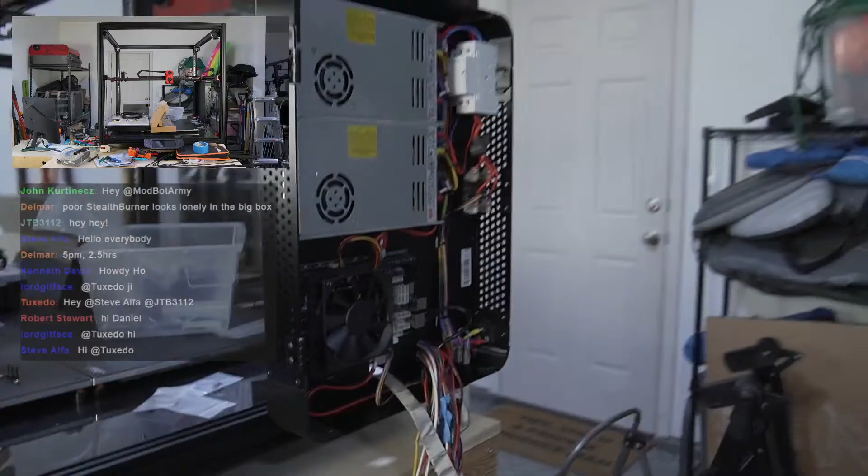So last week we had started on the cable chains. It's gonna be a little hard to see, but I will do my best to show you guys things through the crevices.

There's a notification, I can't see it. I'll run over to the tablet really quick.

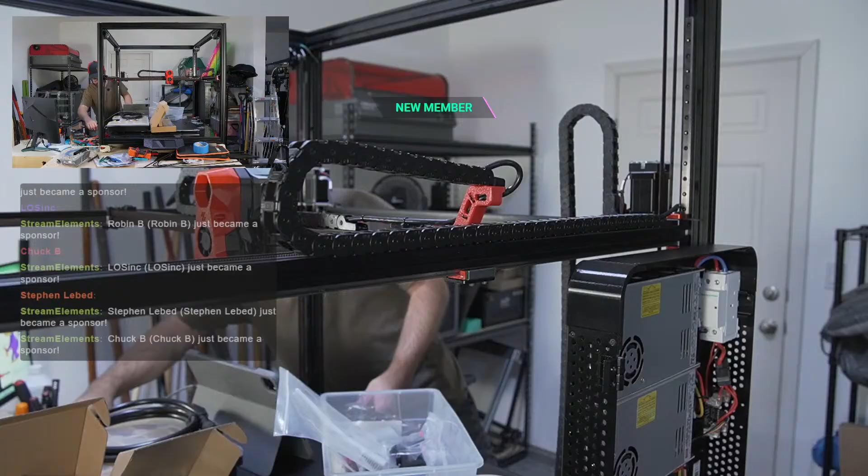Thank you, Nice. So yeah, we started on the cable chains last week. I think we finished the X, and then I was working on Y, maybe. Does that sound about right? So the things I've done: I had to move the X chain over a little bit. I probably could add a couple more links. There's a bit of a gap here. One concern I have is this cable.

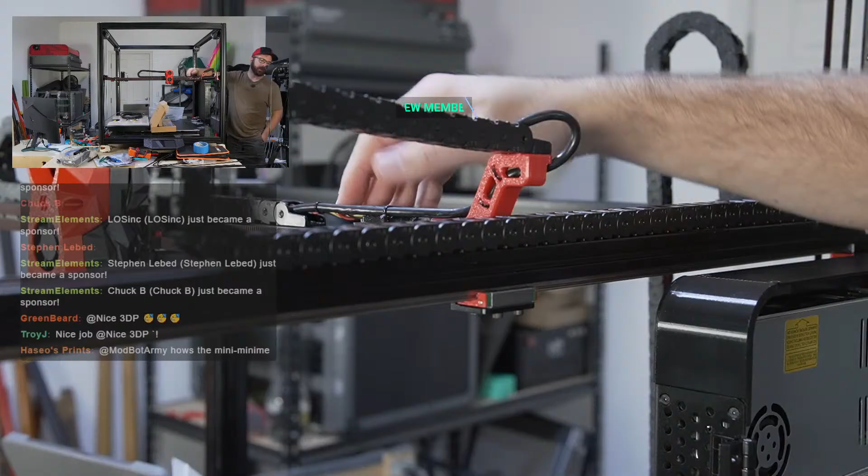Can you see that cable at all? Let me see. Not really. There's this colored cable right here, which is for the LEDs underneath the X carriage. I have some concerns about its length. I could always extend it, but it's a little shorter than I would like. I don't want to say it's got slack, it's under very light tension. So that's something we'll see about.

I probably could add a couple more chains, but I'm gonna leave it for now. I got the Y chain done, which was relatively simple, so we've got really just our CAN cable running through here. I did that, and then I've got the Z cable installed, which I just finished up last night. Let me see if I can show you guys this.

Other things I've done: I labeled and grouped the bed cables together. They're not sleeved, I might sleeve them, I don't know how much. Honestly, it's at the back of the printer, I don't think you'll really be able to see it. I don't know how much I truthfully care to cover these, but I did group them together.

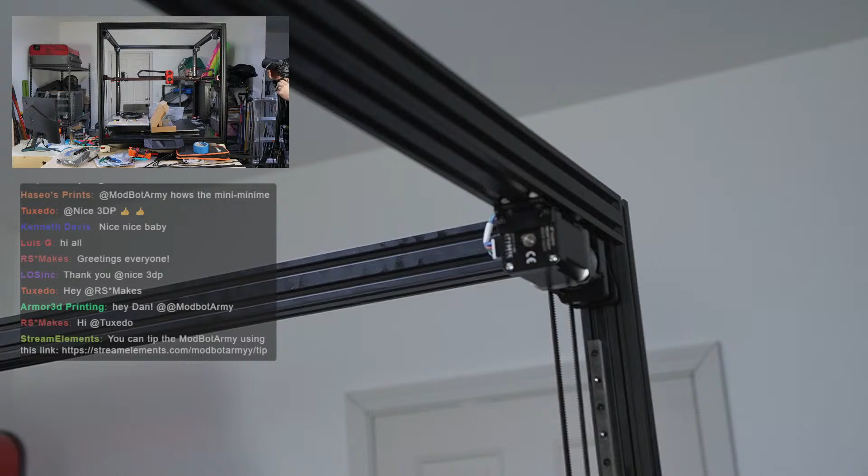I also installed, let me take you guys a little bit higher up. So the Z motors, excuse me, didn't have their wires plugged in. So I connected all 4 wires and routed them. That took me a little while, both because it just took a while, but also because of looking at this. I'll show you guys.

Let's see here. Also, let me just check chat again. Hey, Luis.

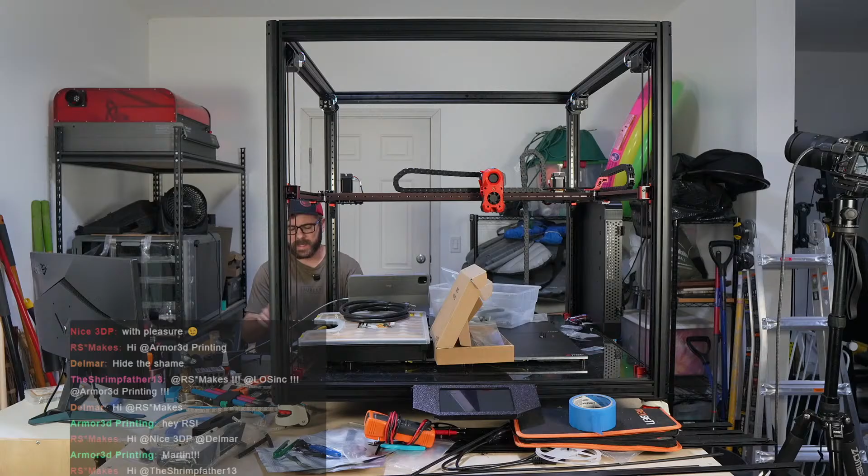Landon's been with Erin at night, and then Jackson usually wakes up anywhere between 11 and 1:30, and then he's with me for the night. So when I was trying to go to bed, I heard him crying. And as I was laying in bed for 2 hours trying to sleep, I heard him crying a little bit more throughout the night.

And this morning, Erin said he was basically crying all night long. And right now, he was sleeping for a few minutes by the fire inside, and woke up and instantly started aggressively screaming. So I don't know what's going on with him. I don't know if he's sick.

We've tried burping him, we've tried feeding him. I tried these bicycle kick things and pushing in to try to help him with gas. Tried that, had no cigar. So I'm not sure what's going on with him, but he is definitely not having a good day.

Erin's exhausted. She didn't sleep at all last night. So I took Jackson out for about an hour and a half this morning, hoping she'd be able to get some rest. But he was still up and crying pretty much the whole time. If you had asked me a day before today, I would have said things are going well, but the last 24 hours have been pretty freaking brutal.

Nightmares, trying for attention - with Jackson or Landon, Jackson is probably more of an attention thing, I think. Once I get him in the guest room, he starts off the night in his bed, and then he wakes up and now he's in the guest room, which is where I've been crashing out. And so he'll sleep through the night in there. But with Landon, I think it's something else.

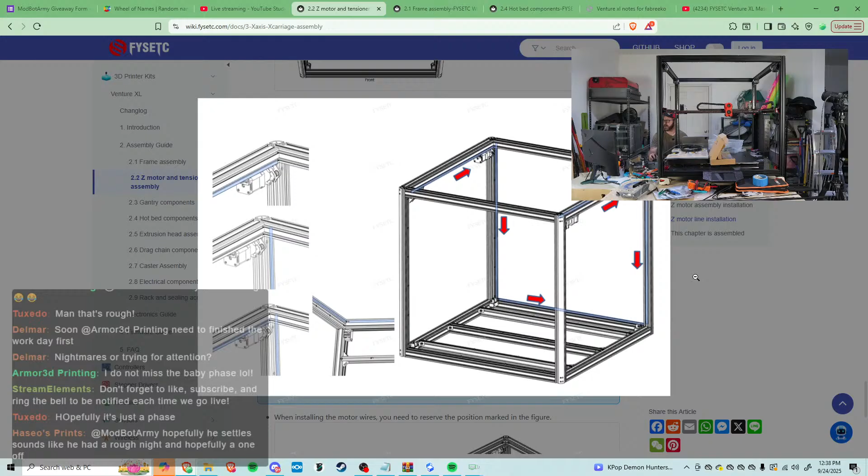So I looked at this a little bit longer than I probably needed to, trying to make sure I was doing it correctly. There's also a notice because on the back panel, where I ran the wires, you have these standoffs, so the wires have to go over those little standoff things or mounting points. But as of right now, I'm not installing panels because I've seen that they're either cut really tight or too thin, so they warp like crazy, even if you're not printing at warmer temps. So for now, I'm not doing panels.

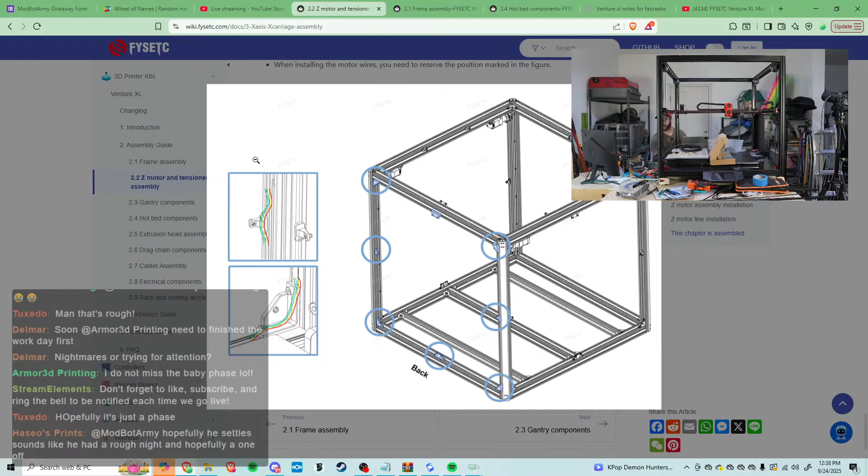That's also something you might have seen on this side. So I mounted the electronics box last night, and you wouldn't want to do this.

The instructions actually have you do this before putting the panel on, but I got feedback from someone, and it's also just not possible, as far as I can tell, to get the panel on after this is here. So when I do end up doing panels, whether it's their panels with some sort of additional secure points or whether I cut thicker panels, I'll have to pull this whole thing off, which I'm not super excited about, but it's not that bad.

It was pretty difficult getting the T-nuts, the little roll-in nuts, lined up with the mounting points on this, I will say, but it's pretty secure. I mean, this is the weakest spot because it's in the air, but the rest of the panel is pretty dang secure. So yeah, I spent quite a bit of time really just routing electrical.

All the stuff underneath the bed, I connected all of the neutral wires for the 4 beds, and then all the rest of the wires are just kind of rat's-nested through here.

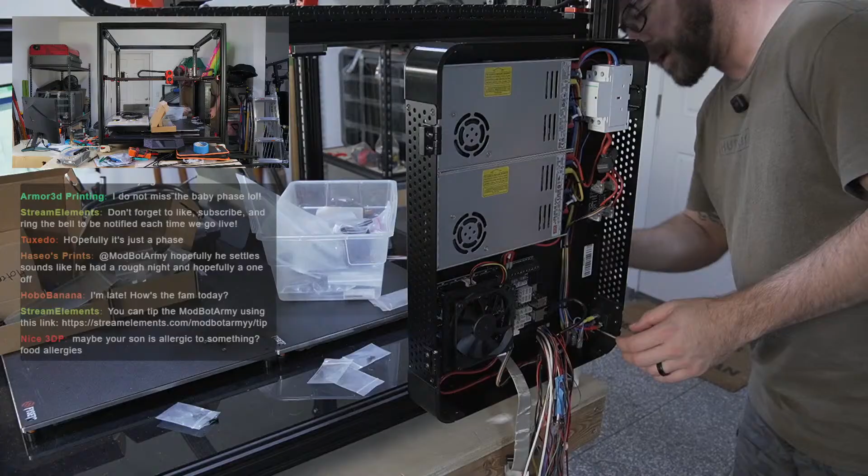I already know for certain that there's one wire - I don't know if you guys can see this or not, let me zoom in a little bit more. That might do. So for sure, this AB wire is too short. The plug, this is the full distance I can get it. So we'll have to remove that, and I'll end up probably just soldering and extending those wires so we can get them to - I think it's over here maybe, or it's somewhere underneath this fan.

Other thing I did as well, I did a lot more. I also mounted this guy, so the LCD screen is in place. That was relatively straightforward. And then my plan long term with this thing, I don't think I'll have it on the ground because it's just so big that...

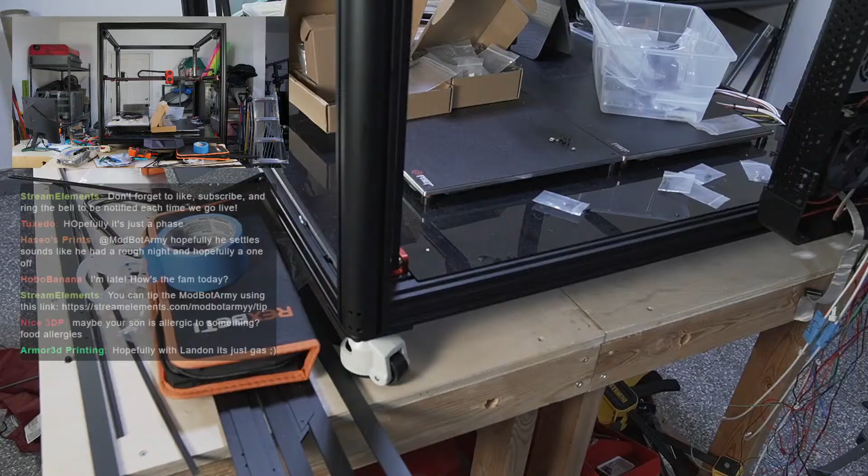No, I don't think I'll have it on the ground because it'll be at a height where it's kind of awkward to be on the ground, because it might be tall, but the build plate's still down here, so you'd have to crouch down every time.

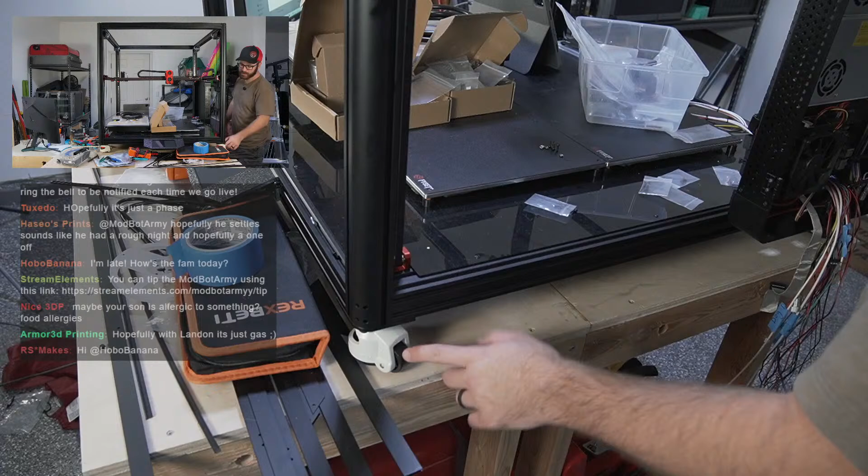So I'm very likely going to build a cart similar to what it's on right now. And the game plan was similar to what Taylor or Kanik did, was to not use casters. However, once I got the neutral wires installed underneath and the screen, I realized that at least the screen protrudes beneath the aluminum brackets for the feet, so it would be putting all the printer's pressure on the screen and possibly the neutral wire. So I did install the casters for right now.

I know that it looked like Taylor basically had printed out just printed feet standoffs, which I might end up doing, or I might just end up leaving it on casters and then basically roll it onto the cart that I make for it, and then have some kind of trim so the casters can't fall off, or the thing can't fall off. But if I ever need to move this thing or transfer it on the ground, then I've got the casters on it, because getting them on and off, like flipping this thing over, is not a ton of fun.

So yeah, hopefully it's just gas. Maybe it's allergic or something. I mean, maybe.

Yeah, it was definitely rough. We're hanging in there, Hobo. It was a rough night, man. Landon was pretty much up all night long, so Aaron's exhausted, and he's been just kind of screaming. So he's just drinking milk, so I don't know if Aaron had something, but I don't know how that all works as far as what mama eats and what happens with baby feeding. I'm not certified to speak on the matter.

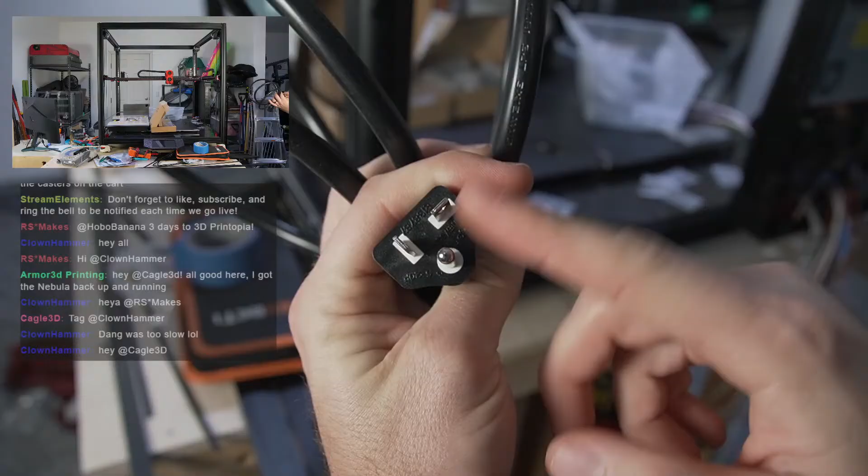There's a plug on the side of the house, but a 20 amp cable or circuit in the US normally the connector would have another one right here, parallel to each other, but on 20 amp, you've got one that's flipped 90 degrees. I was planning on plugging this into the 15 amp dedicated circuit I have in the garage, but I can't. So I have no way of currently plugging this thing in, which is really a bummer. I'm not exactly sure what my game plan is.

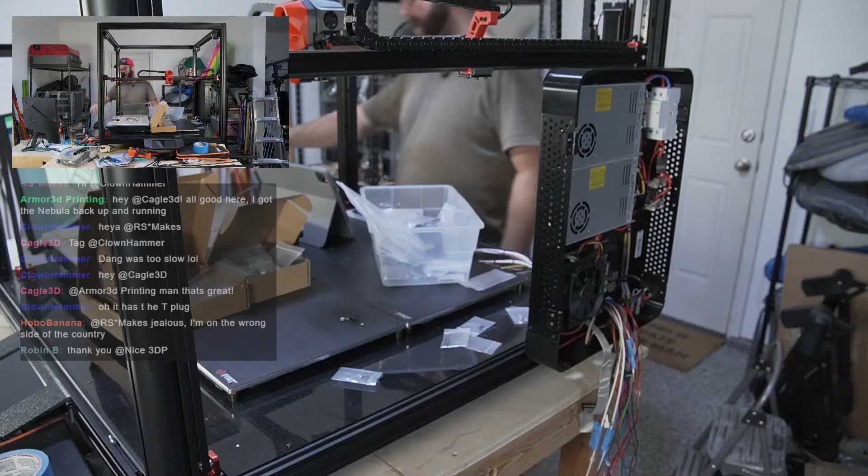The long term plan, my dryer is 220, isn't it? Is it 220? Are we certain it's 220?

So a couple things. The plan has always been that I need two 20 amp circuits in this garage. I was going to have one over here and one over here, mainly because here comes Jack.

Hold on, you want to say hi to everybody? What's wrong with your pants? Jackson's going to say hi really quick, everybody. Can you stand up? No, stand up. Stand up real quick, wave forward. Wave. No, it's way over there. Wave over there, he's waving. Hi, what are you doing with your tongue? Okay, Daddy's got to work, you got to go inside with Mommy okay? Okay I love you, mwah. I'll see you in a little bit okay? Go take a little nap, you have a full belly, I made you some yummy food. And he came out right now, I was like, what is he wearing? It's like a skirt. You guys couldn't see it right now, but he came out in what I thought was a skirt. But I guess Aaron told him put pants on before he comes out and says hi, and he grabbed a shirt and put a shirt on his pants. So that's what was going on there.

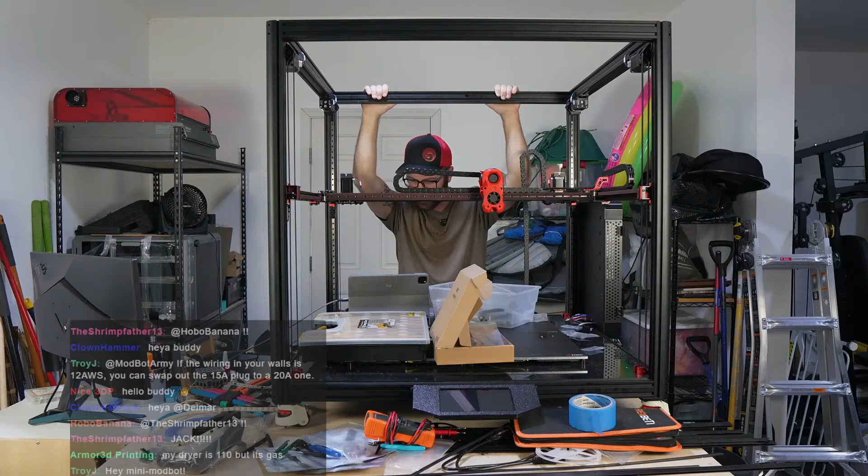If the wiring in your walls is 12 gauge, you can swap out the 15 amp breaker. I've heard that, and it is a new build, so it's possible that's the case, but I don't know whether that's the case or not.

So a couple things. The plan has been that I was going to get a 20 amp circuit over here and a 20 amp circuit over here, because during winter time I need to run a heater in here because it's freezing and it draws a ton of power. And then I cannot run that with the dust collection for the CNC. I kept tripping the circuits or the breaker last season. So that's always been the plan.

Other than 3D printing, I haven't really done any electrical work. I installed smart plugs in the living room, and then added ceiling fans, but there were already pre-existing hookups, so it was basically just making sure the switch was off, screwing in the wires, and bolting the thing to the ceiling. So I looked into what the process is like to add a 20 amp circuit months ago, and also again last night.

Smiley face emoji, he loves ice cream. Nice, thank you, nice donation. He is definitely, every time he finishes his dinner, he shoves the last piece in his mouth and says, all done, ice cream.

So I did quite a bit of digging last night, and I feel like I've got a pretty good grasp on what's required. Basically figure out the spot that I want it, make sure there's not a stud behind it, cut through it, get the blue plastic receptacle box, trace the wall, cut through the wall.

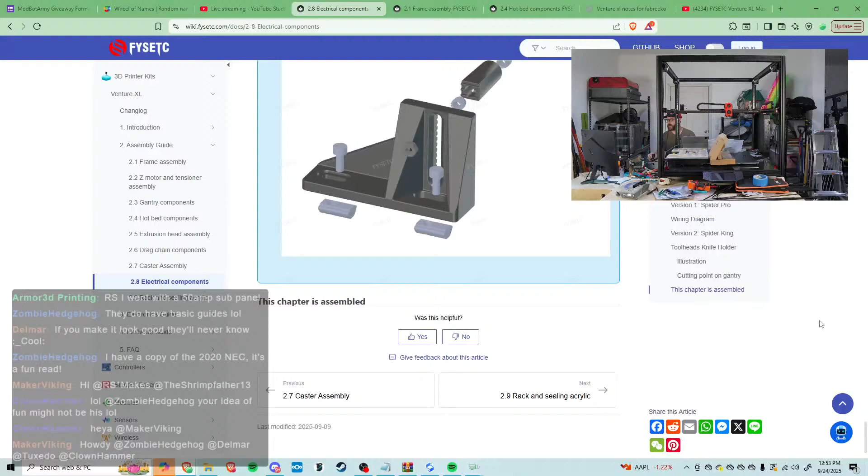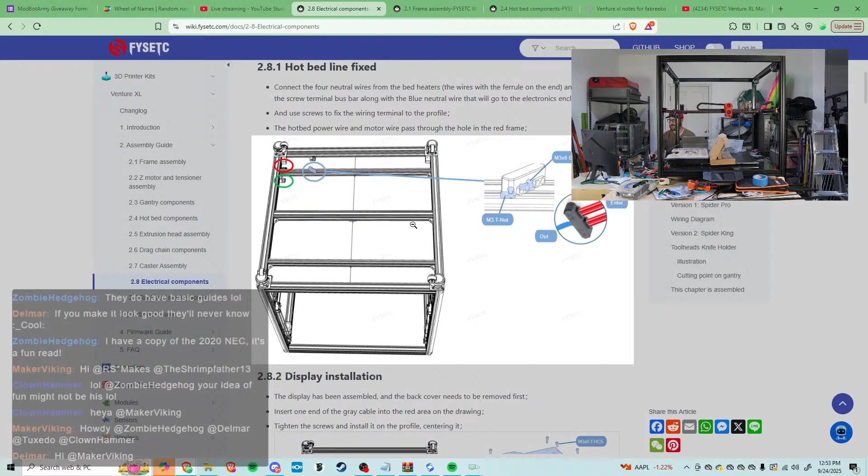This I was a little uncertain about. It says install a magnetic ring at each end of the display screen. I couldn't find that, but I did some looking last night and saw someone say that it's not where you'd expect it. So I will look one more time for this.

In Europe, most homes have 40 amps, mono or triphase, 400 volts neutral. In the UK, although there's regulations, you're at the mercy of whoever wired the house, depending on the age. I've seen some crazy stuff. Yeah, I've been reading a bunch of stuff about electrical and basically saw that if you have an older house, it's probably not up to code.

Okay, so I definitely don't see it in here. This is all hinges, electrical stuff. Great, let's move you off to here.

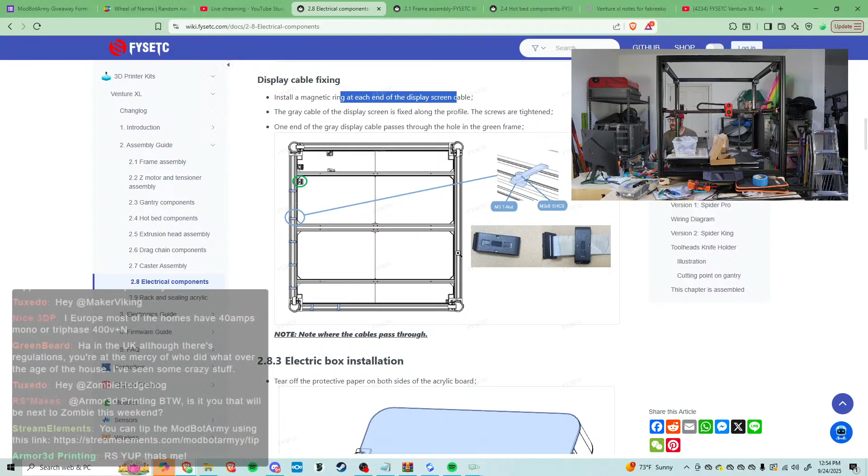Okay, I think this is the cable. So it says—the thing that's a little weird to me—is it says to install this magnetic ring, right? And I don't really understand why. When I installed the screen, I don't see how I could have put it in here. Let me see if I can zoom in a little bit. The images are just not very big. Let's see, can I zoom?

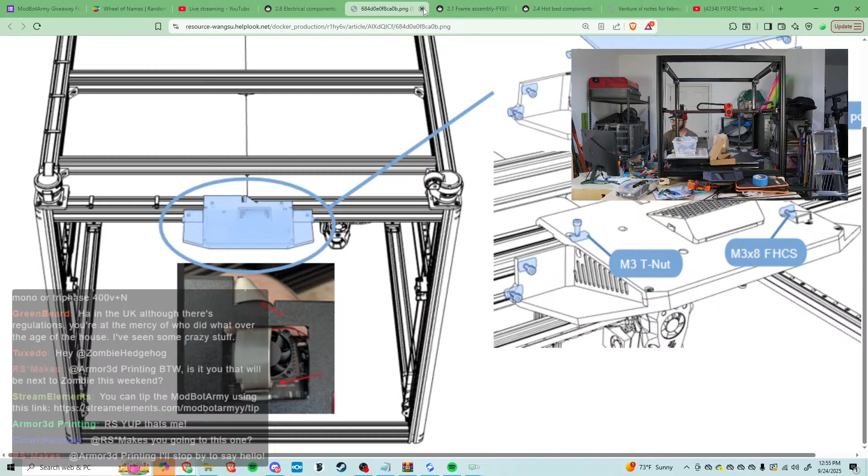So inside here, you basically plug it in right here. You have to go over the fan, which seems silly to me because you're basically blocking some of the airflow, and then it goes out here. So I don't see anywhere that could fit one of those electrical ring things, so I'm going to ignore that. But on the other side, I can install one, but I wonder if it's just to support it by having it snap onto the metal or steel electronics box. So I'll grab one of these—excuse me—but I don't fully understand what its purpose is, if I'm being honest. It's a little strange to me. I don't think it has anything to do with affecting the signal of the cable.

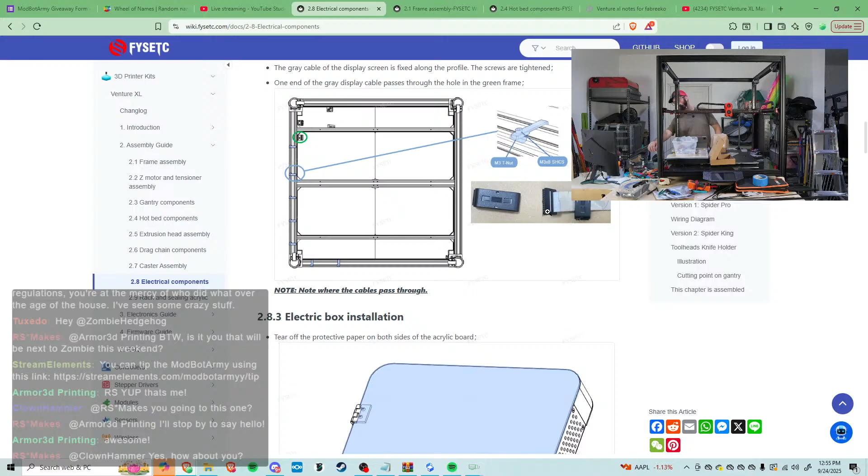But yeah, it's basically—is this... well, that's not... is it for the signal of the cable? Is that what this is? Because it doesn't stick to anything, so the magnets... it's interesting, I really don't know. I've never seen that needed on a cable like this before. So it basically just goes over... I don't know if you guys can see what I'm doing. I guess I will install it on this one side for now, and if for some reason I run into signal issues with the cable, I can install it on the other end, but I've never used something like this on a ribbon cable.

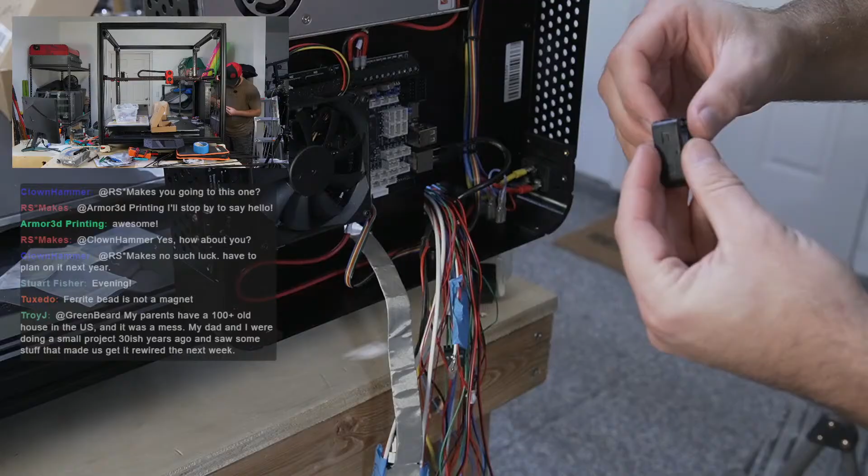Did I break it? Nope. So yeah, it basically just slots over the cable and then snaps in place and is loose, so I can install it outside of the screen display.

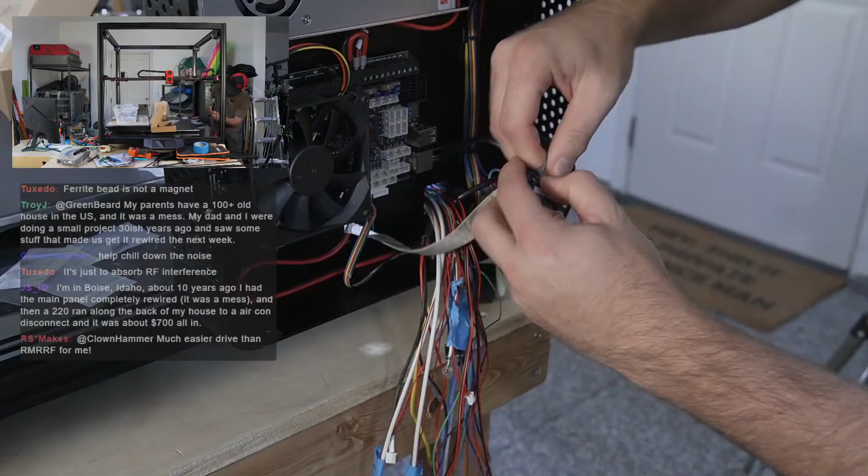And then this, we won't be able to use either. This little adhesive piece, I'm just gonna rip this off. But I think I'll wait to install... Oh, the display cable just goes right here. I guess we can install that, that way we feel like we've done a thing.

I wonder if it has something to do with the signal, like help with noise or something like that. Does anyone have any... Help chill down the noise. It's just to absorb RF interference. Got it, okay.

I've never used that before. I guess, I'm in Boise, Idaho about 10 years ago. I had the main panel completely rewired, and then a 220 ran along the back of my house to an air con disconnect, and it was about... Wow. So you're not far from me. I'm in Nampa, Idaho. I imagine that would cost 4 or 5 times that amount now, because just doing a Google search online of how much does it cost, like what's the average cost nationwide to add a dedicated circuit?

Obviously there's a lot of factors. In my case, I would think it would be on the cheaper end because it's so close to the panel, it's an attic that should be wide open. But the price range is anywhere from, I think the low end was like $300 up to $1,000 per circuit. Last night I added all the stuff to the cart just for fun, like the receptacles, the boxes, the wire, everything. I think for 2 dedicated circuits it was gonna cost me like $200, including the cost to have someone come out and inspect it and sign off on it.

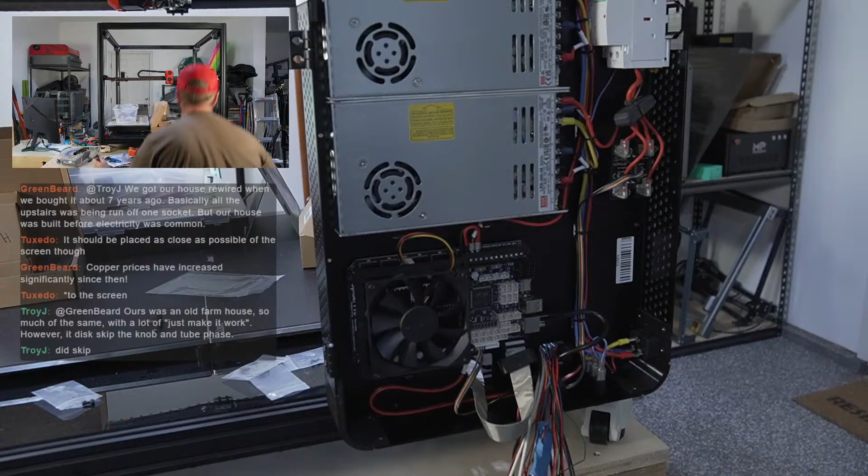I will hold on to this piece, but I will hold off because I don't want to flip this thing over again. It's sketchy every time I have to flip it, but that's good to know.

Ours was an old farmhouse, so much of the same with the old, just make it work. However, it did skip the knob and tube phase. Copper prices have increased significantly since then. Yeah, I'm sure that's it. It's magnetizable, but not a magnet as such. Got it.

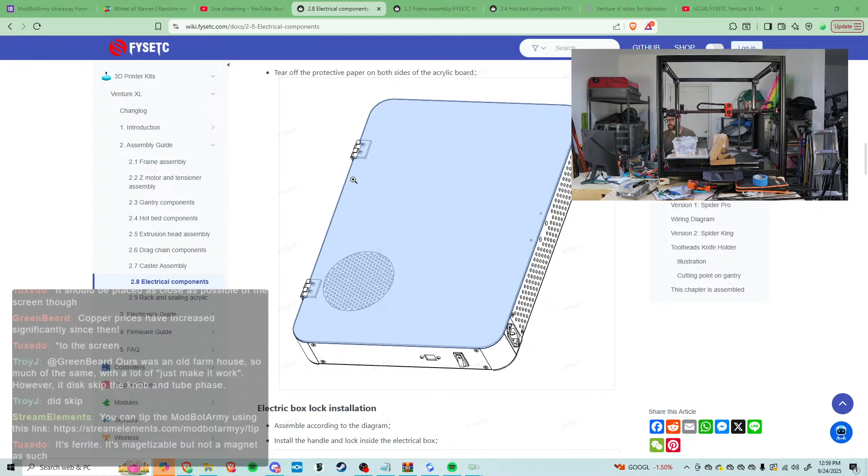Okay, so I did the electrical box install. I took off the front door panel. Someone told me it's pretty fragile, so I didn't want it whipping back and forth while we were working on it. All cables get run through this hole, and then the LCD cable goes through there. So let's start by removing the fans and take a look underneath it.

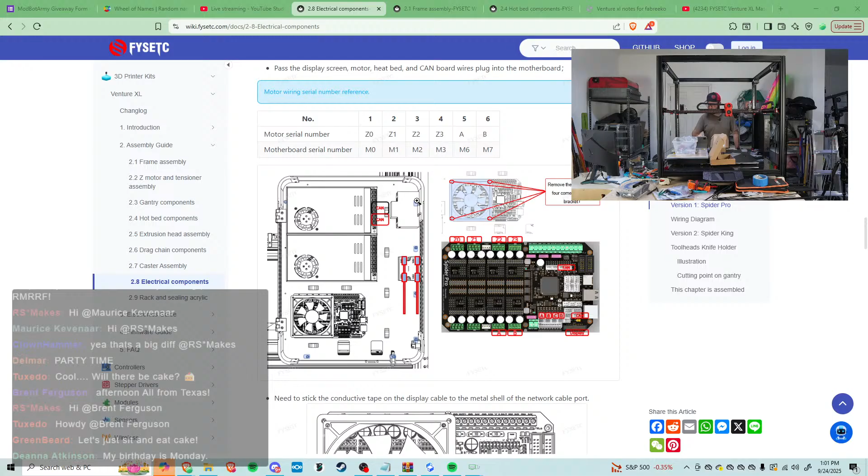Hey Brent! Party time. Sit and eat cake. Maybe we'll just... your birthday's on Monday? Oh, happy early birthday! You're a Libra too then, right? I'm pretty sure there's a cutoff at some point in September, but I think you must be probably Libra as well. So let's start by connecting our bed AC to this guy. There's no number or letters on here, but I'm pretty sure the board itself is labeled, and I labeled the plugs. So let's try that. I'll just order some pineapple pizza and we'll just kind of hang out. That sounds fun.

Okay, so let's move the camera up to this guy right here. And I did a sweet job of... oh, I don't even know if these are long enough. Oh my, maybe? I don't really want to tug on these. Really, is there not more length? Oh, there's a little more length. Not a lot, but a little. Jeez, okay.

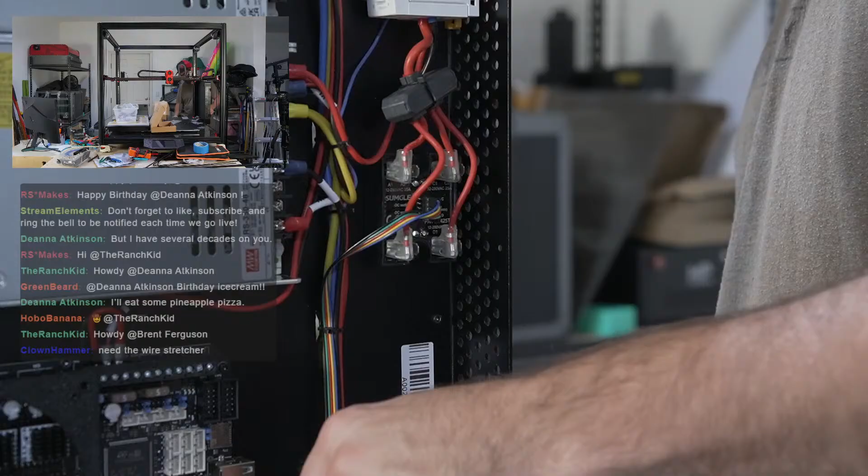Great, of course this one needs to go way up there. Well, I might have to... dang, dude. That's a bummer. I wonder if I can route it differently. I don't want to pull on it anymore. Yeah, it's too tight, it needs slack. I'll have to figure out that one then.

Does anyone know what this is, because since it's AC, I can't solder it. I could cut it. You know what I could do? I could probably use Wagos and just basically strip it out, but I'd have to recrimp this, and I'm not exactly sure. If anyone knows what exactly this connector type is called, I think someone said it might just be a right angle, like spade style connector, but here, if you guys can see this, I'm gonna have to order some of these. I definitely don't have this type of cable.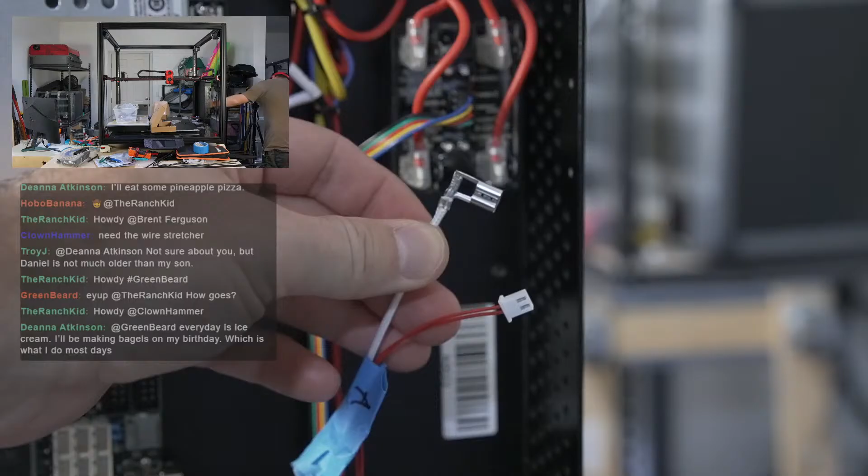It's just a right angle spade, that's kind of what it looks like to me. I wonder though, crimping it might be interesting. I don't know if the regular one works, because I've got here, let me show you guys this. It looks like just like a right angle spade probably, a flag connector, but you need a dedicated die to crimp it. I don't know if I have it. I probably don't.

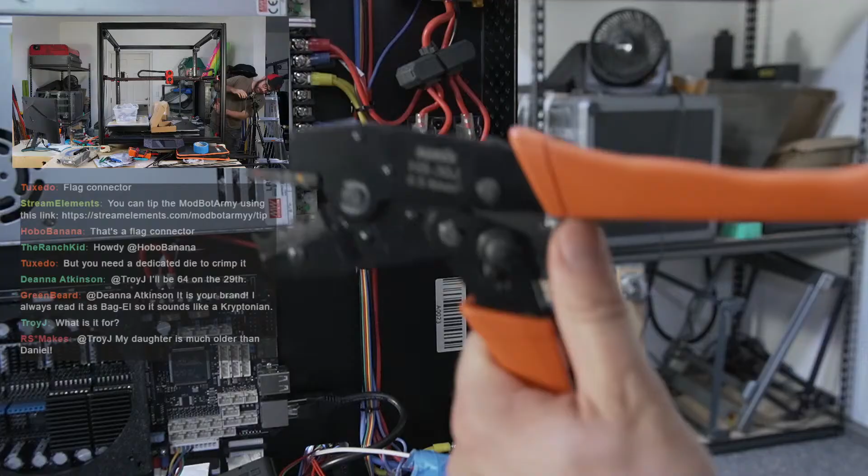I assume this guy's not gonna work. This is what I usually use for spades. I wonder if I can just get the die for it, because these have swappable teeth on them. But yeah, I don't think this will work for that. But this is what I would normally use if it was just a standard spade connector. If you're wondering, you don't have it. Yeah, I wonder if iWiss makes just some jaws I can buy for it specifically.

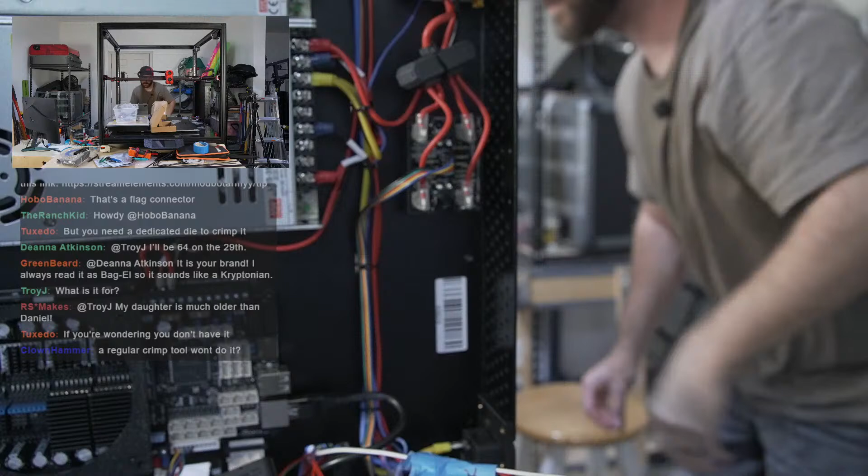I don't think there's any other way I could have ran it to make it fit. Okay, you're saying it's called a flag connector. All right, I'll look into that then. Let's see if the other ones at least can fit. So we're not gonna do that one. Here's D, D is way long. This, I mean, if I end up getting the proper crimp tool for this, I'll probably just end up shortening a lot of these because these are super long, most of them.

It's just the one that's really short, the rest of them are perfectly fine, by a long shot. I've got so much slack on the rest of them. And this is C, C is right here. Okay, that's in. You're able to swap the short with the long. The wire is not hung up. I had to swap out some of the wire.

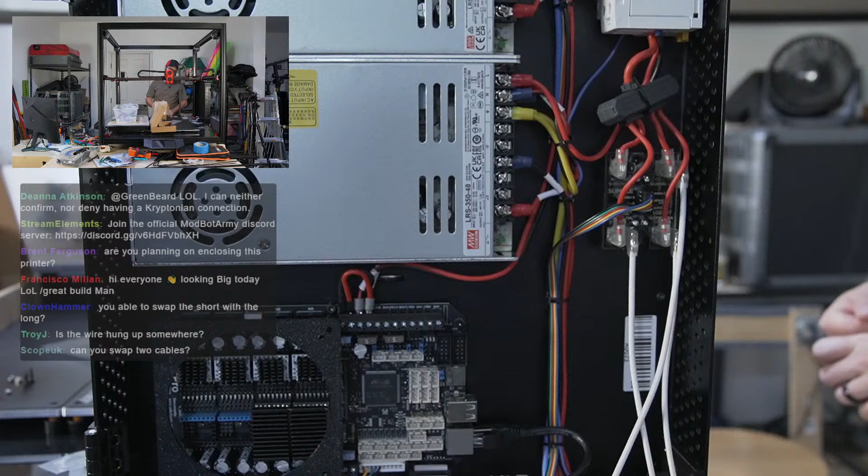What did I do initially? They sent me... I'm trying to remember how I did it. So initially this didn't have... there were no fuses, so they sent fuses. And with the fuses, I think the fuses were already pre-wired. How did I swap them out?

It's gotta be the farthest bed. I don't know if I can show it with the camera, maybe. But it's gotta be this bed, the front left bed, which has the longest travel distance. I can shine a light underneath it and see if I see it hung up anywhere, but I don't think so. I'm pretty sure I pulled everything through as best as I could. Yeah, no, it's definitely not...

It's definitely not. I mean, I guess what I could do... I could get a different connector type. I can see what connectors I have upstairs, possibly get a different connector type, and just add sort of a jumper wire in between it all. I don't love the idea of that. I'd rather just have the cable ran all the way. In this case, I'll be using a Wago, but yeah, I might have another crimp upstairs that I could use to basically connect some wire in between them.

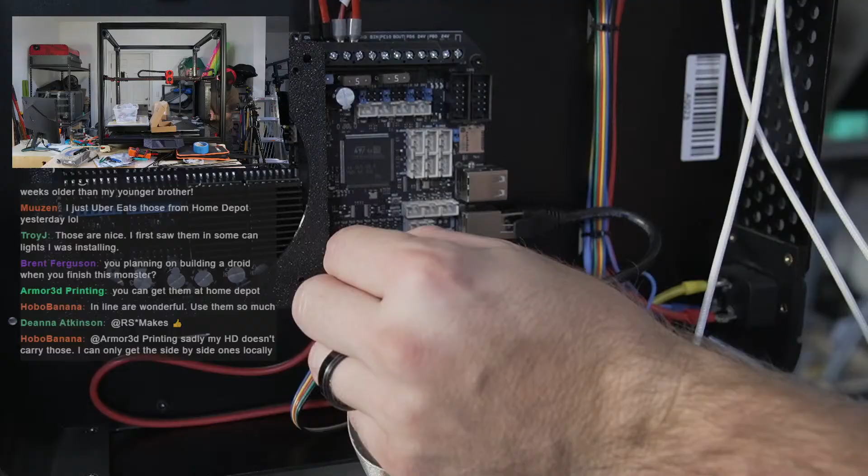Okay, so A is going right here. Nope. A is going right there. Well, let me bring the stool around. If the battery's charged on this enough, I'll take you guys with me. Yeah, 84%, we're good.

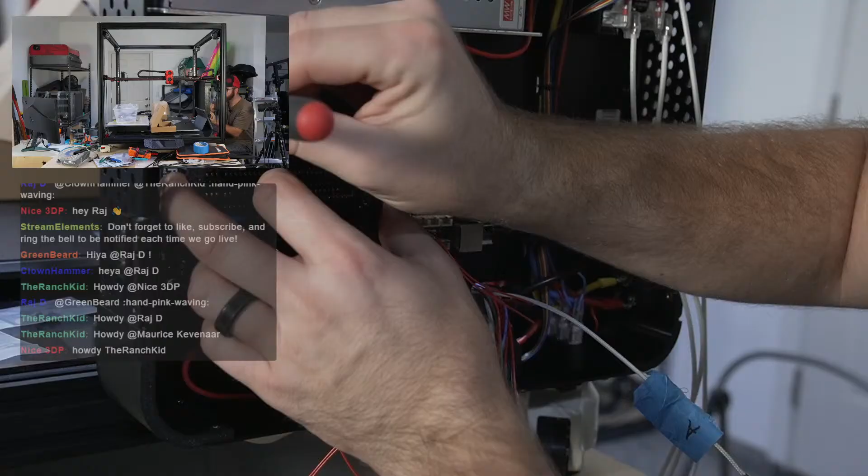All right, so we've got access now to all of our, a lot of capacitors, a lot of beefy capacitors.

It is 48 volts for XY, yeah. So we've got XY or AB, and then Z1, Z0, Z1, Z2, Z3, and then there's another stepper motor or stepper driver on the CAN bus board, which I assume is probably just a 2209. I think these are all 2209s. I can't see, oops, sorry, my head's in the way. I'll unplug one.

It's covered, but I see S22. I have to assume it's probably 2209s. The big guys, I'm pretty sure they are 5160s. You can also unplug one of these, maybe.

Not the easiest to get to without taking off... well, I'm taking the heatsink off. So let's look at the... I looked at them before. Let's not take those off. Yeah, they're 5160s, we looked at them. Here, this is the spare ones that they send, the big 5160s.

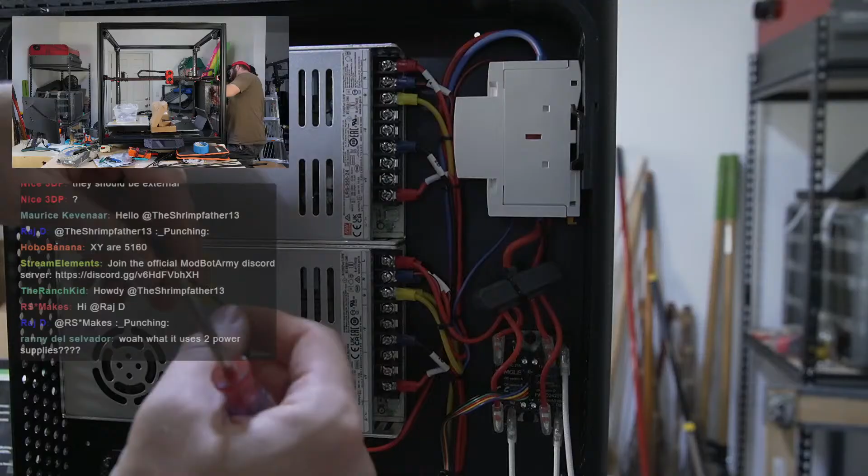Okay, let's run our black wire. Do I want to run it underneath things? Maybe not, that's all AC stuff, maybe I'll keep it above. I kind of like the idea of running it underneath for organizing, but maybe I'll keep the low voltage up top. Oh, this is... they ran it together. Maybe I will just end up zip tying it all together. For now, let's just leave it loose, I suppose.

Okay, so we've got our CAN negative. Okay. And then we've got our CAN positive, which will go right here.

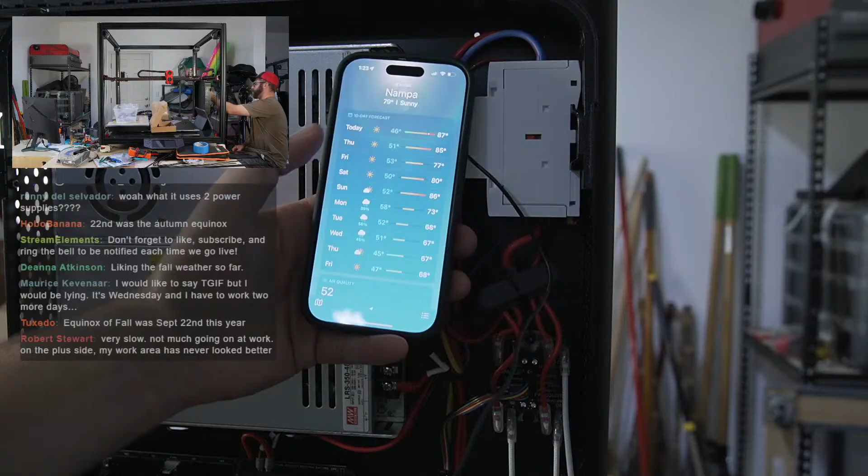The 22nd, the 22nd was autumn equinox. Liking the fall weather so far. Is it getting a little cooler? It's dropped, it's still warm. I don't know what the temperature in the garage is right now, I haven't looked this morning, but yesterday was like 80 something. So right now it is 79, the high is 87 today, so today's like the peak of the heat. Of course, I think I remember that because I told Aaron, but we got some nice drop off. I don't know how well you guys can see that, but it gets cooler the next couple days and it climbs to 86. But after that, we dropped to 73 and then high 60s, which would have been really nice temperature to stream in the garage at.

But we will do more streams out here. I want to get the VCore 4 toolhead swapped out and get that thing updated. And then I really finally want to get the Milo electronics done and running. So the Milo will be a perfect thing to bring down here to the garage where it was always going to live, and finally get that guy up and running. Maybe a year later.

It was 57 this morning, 80 this afternoon. Wow, that's a pretty big spread. 57's like, ooh, a little chilly, and then 80's like a little hot.

My oldest got the shingles disease. Oh my gosh, I don't know much about... Is shingles... this is going to maybe be a silly question, and I apologize if it is, but shingles isn't the same? What is shingles? And what is the thing that you can get that's like chicken pox, but as an adult that's more dangerous?

That's the main reason I haven't streamed all summer. I can only stream from the garage. Oh god, yeah, I get it. We streamed, it was 95 in here when we were streaming the other day and I was miserable. Right now it says 86.4, so that's a lot cooler than it's kind of been. Still not okay, but it is what it is.

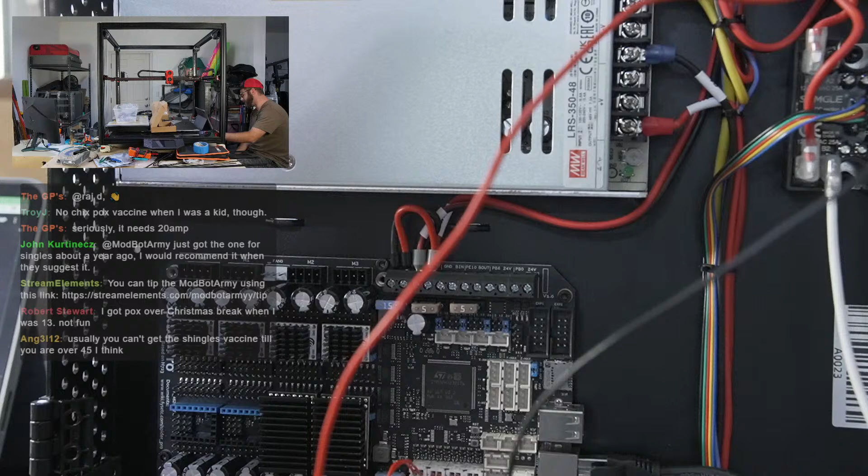These should also ideally get recrimped shorter, though I'd rather have longer cables than shorter cables, to be fair. Wait, this says HF. That doesn't make sense though. HF to me would be like heater fan or hot end fan, but we're running CAN bus, so everything should be going over CAN.

So I'm going to assume that this label is probably incorrect, and I think the only fan wires we could have would be for those motors. So I'm just going to plug this in here. I hope that's correct. Worst case, our fans won't behave the way they should, and I'll figure it out.

Here's our other fan cable.

Yeah, so I went to the doctor, and when we went to China we got some shots, like flu shots. I don't have my medical record from when I was a child. We got hepatitis shots, and I was supposed to get boosters but haven't. I'm pretty sure I got it as a kid, so I'm trying to reach out to my mom to see if she has my medical record. I know it was in a 3-ring binder, but I need to get a tetanus shot, and I haven't gotten one in a really long time. I didn't get it the other day because I know it's the one that feels like a donkey kicked you in the arm for a couple days, and with having a newborn and lifting and moving a lot of stuff, I can't be out of commission for 24 hours, but I do need to get it.

So it's my understanding that this should be able to operate at 15 amps. I know Taylor did a first look at this machine, made a video, and mentioned that Phoenix can also operate off a 15 amp circuit. I think it might be a little risky if you heat all the beds at one time, but my plan was always to cycle heat, where there's a macro I saw that heats one bed 10C, then stops, then heats another bed 10C, then stops, and kind of does it like that.

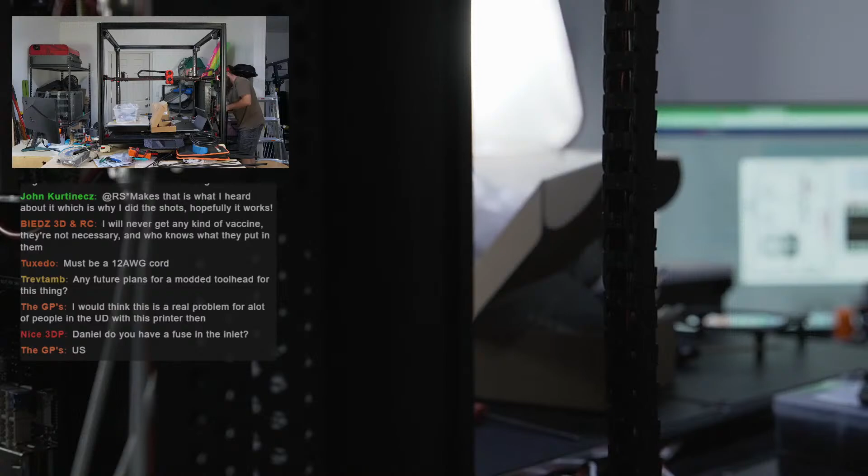Daniel, do you have a fuse in the inlet on this thing? I don't see a fuse, no. I don't see it like some of the AC inlets that have a little pop-out fuse. Doesn't look like it. It looks like it's just the inlet for that cable.

I would think this is a real problem for a lot of people. Yeah, I agree. I did look last night when I discovered this and went into panic mode. I looked in the FYSETC Discord and saw somebody else in the States saying basically the same thing, and I think they were going to rewire theirs, but yeah, I don't think most households in the States have it. I did read that it's not uncommon for garages to have a 20 amp dedicated circuit.

I've looked around, there's one other spot. Hold on, let me check over here, but I'm almost positive I don't have it. Let me see if I unplug this guy right here. This is a horrible place for it, it's literally behind the water heater. Yeah, no, that's just a regular plug.

Yeah, I don't think I've got any in here. And I've actually looked, what am I saying. I've looked in the... let me open up my panel really quickly here. I'm pretty sure the only thing marked is, so there's a bunch of 2-pole fuses.

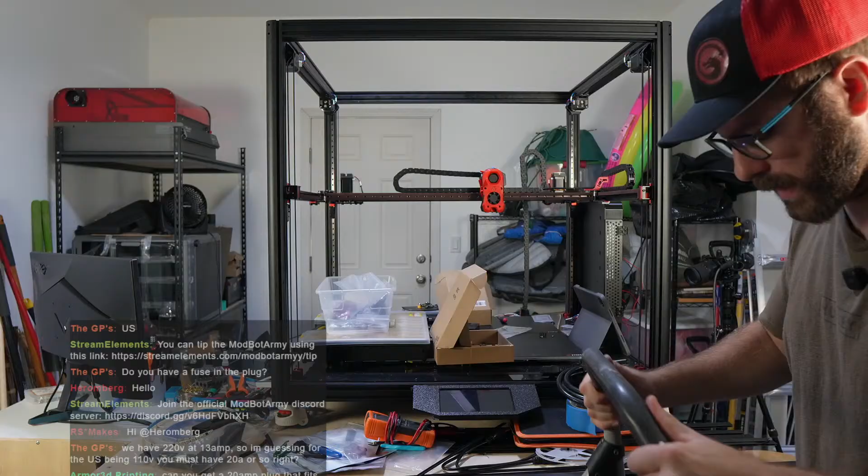Can you get a 20 amp plug that fits in your outlet? If not, swap outlets. Yeah, I'm wondering if that's all I would need to do is swap the receptacle, because I'm looking at it and literally both the garage doors and, let's unplug my garage door real quick here. Okay, so that is the one. So maybe that's it, all I'd have to do is swap out the receptacle.

I'm gonna unplug one more thing here just to make sure. I want to make sure I don't unplug the... okay, that was just the fan. Yeah, so all the outlets are just your standard 110, but if I look inside of that box, it shows 20, so I might be able to just do that.

And if that's the case, I still think technically you're supposed to get a permit for it, but they might have 15 amp outlets on a 20 amp breaker. You would need to check that the wiring on the wall is rated for 20 amp.

Plug the printer into 2 circuits in the house. How would I split circuits though? That's some excellent spaghetti, thank you Milo.

Can you get a 20 amp plug that fits your outlets? Does that exist? Is there such a thing as a 20 amp? I don't know this, so I'm curious, does anybody know? Let me see if I go side view. Here we go, does anyone know if it exists? Because I was going to have to probably get an extension cable anyway for this, so I was looking at 20 amp extension cables. But does anyone know if there's a cable, like an extension you could plug this into that basically converts it to the standard 110 15 amp connector? I mean, if it is 20 amp, otherwise I'd have to swap the receptacle.

That's interesting though, that it shows 20 amp. I wonder if my dedicated circuit is also. Let me check one last thing here. So I do have a dedicated circuit, I had them installed, but I'm pretty sure that was a 15 amp and not a 20. But if they did 20 everywhere else in the garage, why would they have just run it that way?

Garage doors, garage outlets, living furnace, dedicated ceiling, bonus, bath, micro, kitchen, dishwasher, AC. I wonder if they didn't even run a dedicated outlet where they were supposed to, because I don't see anything labeled for it. But yeah, these are 20 amp. I would assume that a builder would not put 20 amp circuit breakers in a home that weren't using 12 gauge wire.

There are adapters to do that, but it's not a good idea. If you can check to see if the circuit is 20 amp capable, you might just want to swap the wall outlet to 20 amp capable.

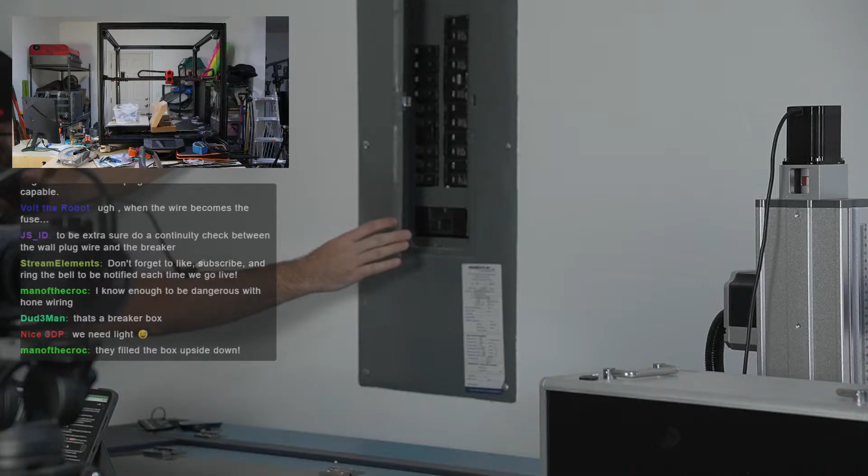It comes in from the top, but it looks like in this case it's underneath it. And the thing I found interesting is a lot of the panels I saw online basically go down to right here. Because mine has this big area right here, do we think it's safe to assume I probably wouldn't have to cut the drywall if I came from the bottom, since there's likely a big opening right here, and that's why they used this specific panel, so there's easy access later on? Does that sound correct? I haven't looked at this heavily, but compared to a lot of people's sub panels I looked at last night, most were like right here, but this has a whole extra spot, which makes me think there's probably a huge opening there to make it easier to get wires in.

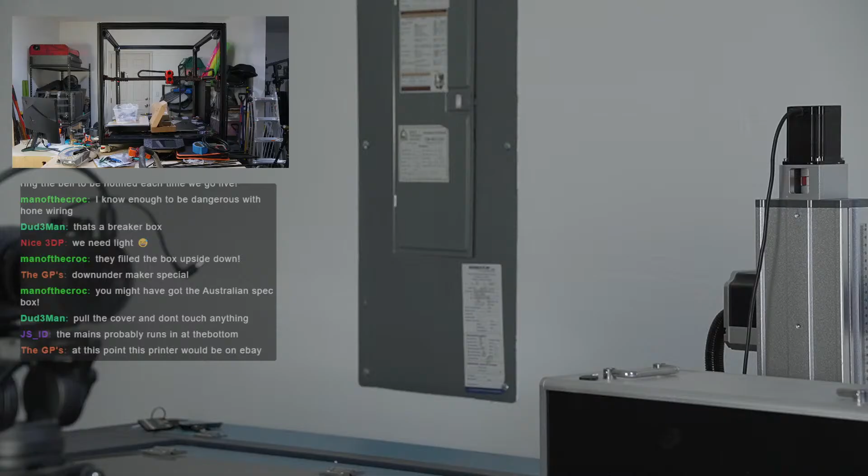Wait, I brought the tablet. You guys can't see? Well, I'm not gonna pull the cover on stream. That I'm not doing.

It must be coming in from the bottom. That's the only thing I can think of, the way that the box is. It's gotta be down below.

I'm gonna pull the cover off of it, but not on stream. I'm gonna do it later when I investigate things a bit more.

But we might be in better shape than I suspected, because if it is a 20 amp and there's no problem swapping out the receptacle, then that's all I would need to do. I still need dedicated 20 amp circuits, but it wouldn't be such an urgent thing.

Okay, let's get back to this. So we've got our AB—no, this is our Z. So one of our ABs is really short. We know we need to extend it, and one of our ABs is pretty long. So based off the path that these were routed, this way, this is going to be the shorter one. So do we know offhand? I need to keep bringing this tablet with me.

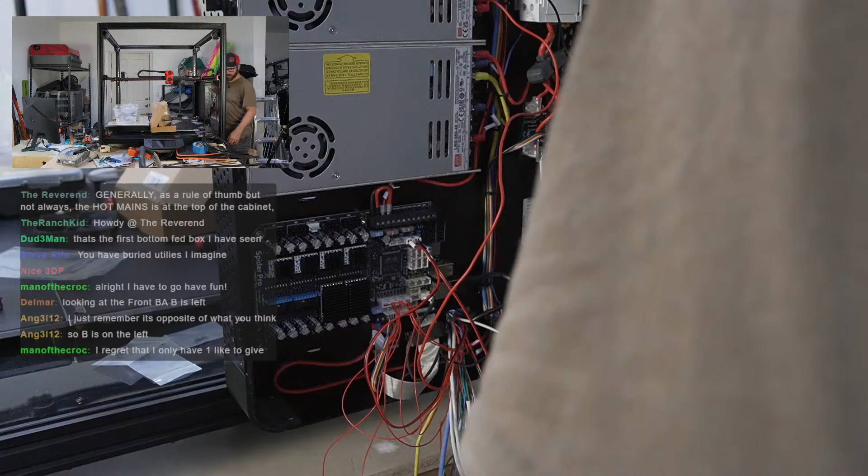Looking at the front, B is left? B is left. Okay, so this is B. So B needs to go. So B, okay. Let me move you guys right here. So this is A then. So B is our short one. And this cable is really, really long, which makes me think we should probably shorten it.

Because we can't power it on, I'm just like, do I take the time and just shorten it? I mean, this is how much length I've got, and I just need it to go right here. I can't see the connection direction though. It looks like that is correct. So just like that.

Maybe I will just quickly do this. And then with the wire that I cut off from here, I can extend the other cable because the other cable's too short. So let's cut this off. Let's see. That's more than enough distance.

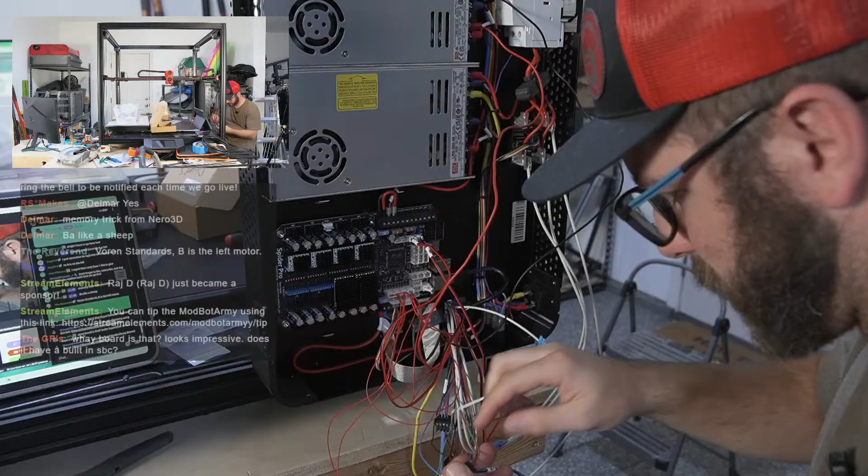Let's see, I'm gonna throw this wire over here because we're gonna need to solder it onto the other—the other motor wires are too short. These are beefy, but I do like that they're—you don't have to crimp them. It makes doing this a lot simpler.

Okay, one wire done. Next we'll do blue.

What board is that? Looks impressive. Does it have built-in SBC? So this is the Spider Pro, and I don't believe it has a built-in SBC. I actually think I was pretty tired when I was doing it, but I'm pretty sure that the actual SBC is in the screen itself. It has to be, yeah. There's USB plugs and all sorts of stuff. So yeah, the SBC is in the screen. These are just motor plugs. Yep.

SBC's, yeah, that's what I thought. It was like midnight when I was doing the screen last night, but I was pretty sure that I saw what looked like a Pi on the back of it, and there was little...

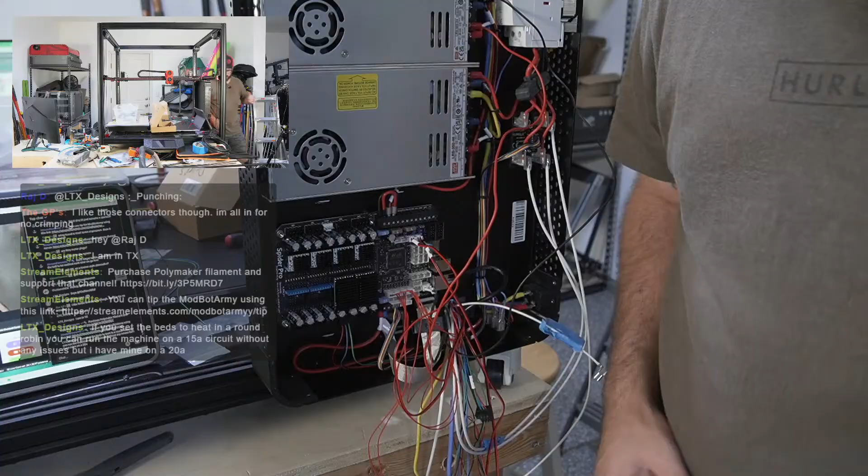How do I want to show you guys this? Maybe if I go like this. It's gonna be a little bit awkward, but we like awkward around here. Let's see, that's probably decent enough.

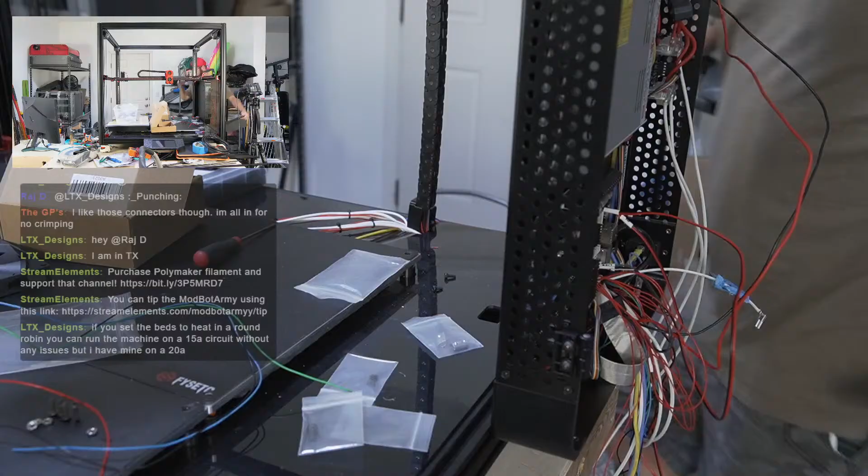All right, so yeah, let me pull that plug through. So this is our little B motor then. It is not long enough. We don't need a whole lot of length, but we do need length.

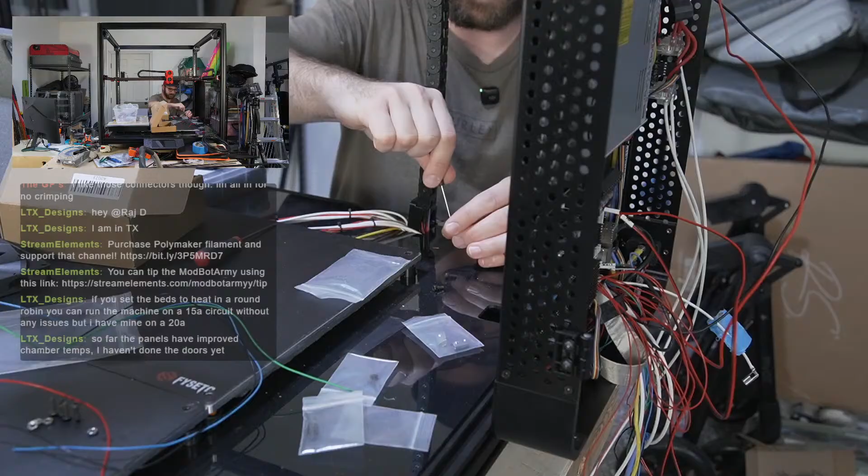If you set the beds to heat in a round robin, you can run the machine on a 15 amp circuit without any issues, but I have mine on 20 amp. Yeah, I was planning on doing round robin regardless, but I would have to rewire it, like change out the connector on it, and I'd rather not really.

Huh, they soldered these. I guess it's probably okay, but I wouldn't have soldered for screw-down terminals. I guess these are just motor wires, but they're also 48 volt motor wires, so yeah, I wouldn't have done that. I would have either bare wired like I did, or done ferrules.

That's interesting. Okay, let me get my... where's our wire strippers? We just used them. There they are.

So far the panels have improved chamber temps. I haven't done the doors yet.

Gotcha. I think I was reading that you said you're planning on doing like, sorry one sec, a 2020 extrusion door.

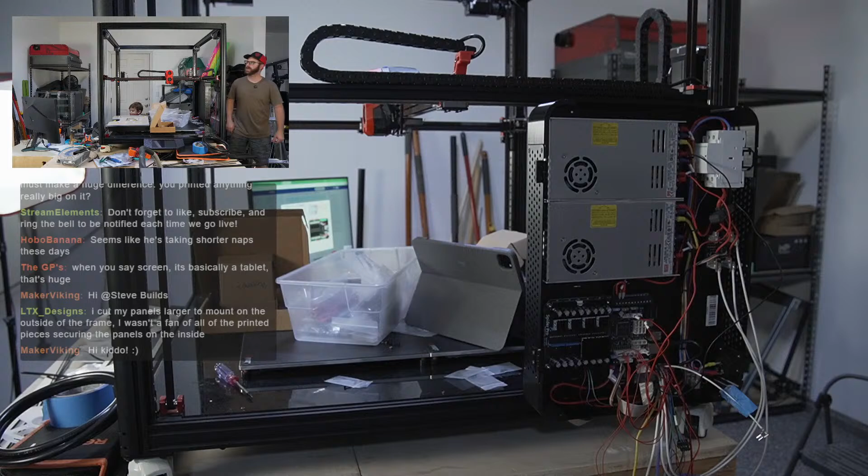I cut my panels larger to mount on the outside of the frame. I wasn't a fan of all the printed pieces securing the panels. Oh, got it. So because I haven't even really looked at the panels after seeing the videos, but that makes sense. So you basically just mounted them to the open slot of the extrusion, while the panels—what's that, nasty fly, I know.

No. Do you want—okay, she's been asleep for a little while? Okay. Gotcha, you want to say bye-bye? Daddy's got to get soldering. You can't be out here when Daddy's soldering. Mommy's there, you can go outside. Mommy may put on some TV, she'll make you some food. Okay, you say bye-bye everybody? Nope, there you go buddy. I love you, I'll see you in a little bit. That's a pressure washer, baby.

So, really quick, I don't know if you heard, but we might have 20 amp circuits in here. It looks like there's 20 amp circuit breakers in there. So I'm gonna pull the panel, the cover off of it, and look at the wire. And if the wire's thick enough, all I need to do for right now is get a receptacle from Home Depot and swap out the receptacle.

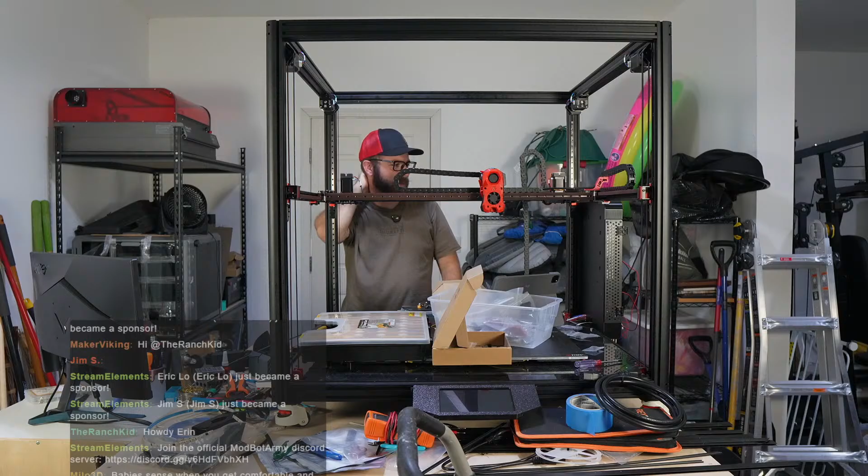I thought maybe gas, because Jackson had issues with that. So the nurse showed me how to do the little bicycles with the legs and push in. I tried that, and that just pissed him off more.

But we're doing well, outside of just, you know, babies sense when you get comfortable, that's when their mission starts. Yeah, he's definitely a vampire baby. Since he's been home, prior to this last day, he's been sleeping quite a bit during the day, like 2-hour naps, sometimes 3-hour naps. And then at nighttime, Erin basically says around midnight he wakes up and is just ready to party.

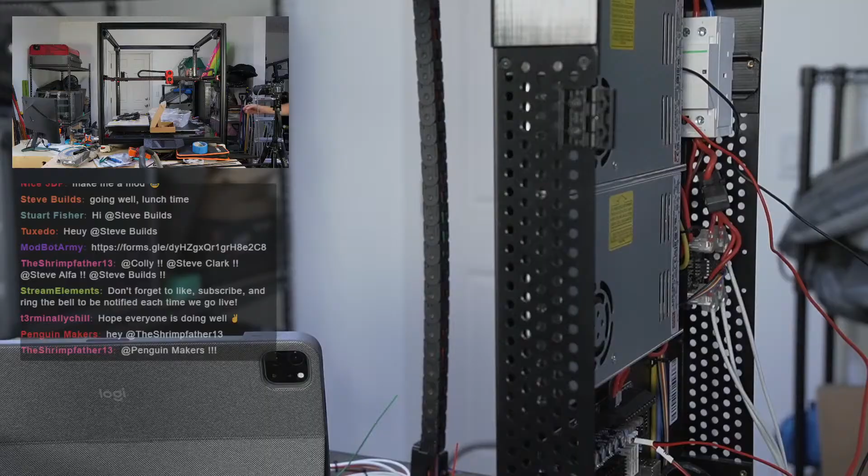I'm going to get back to what I was doing at one point, which was soldering and extending the motor wires that are too short. So let's do that before I got heavily distracted, and I haven't squirreled that hard in a while.

Cool, there's our wires. They're sort of in focus, I think. They look relatively in focus. Let me double check, can you see my hands? Yeah, they're in focus. Okay, so these are the wires we're going to be adding on. They're already stripped, so I just need helping hands, which is very useful especially with how short these wires are. I only need 2 of these.

Did I just drop a wire or no? It looks like I dropped the green wire. I did, there it is. Okay, so I'm going to twist these together.

I'm definitely not gonna spend the time and shorten all the wires right now to get them to the ideal lengths, because I'm probably gonna have to pull the box at some point when I install panels. But this one I had no choice because the wire was just too short, and the one we did earlier was really long, so it was an easy fix.

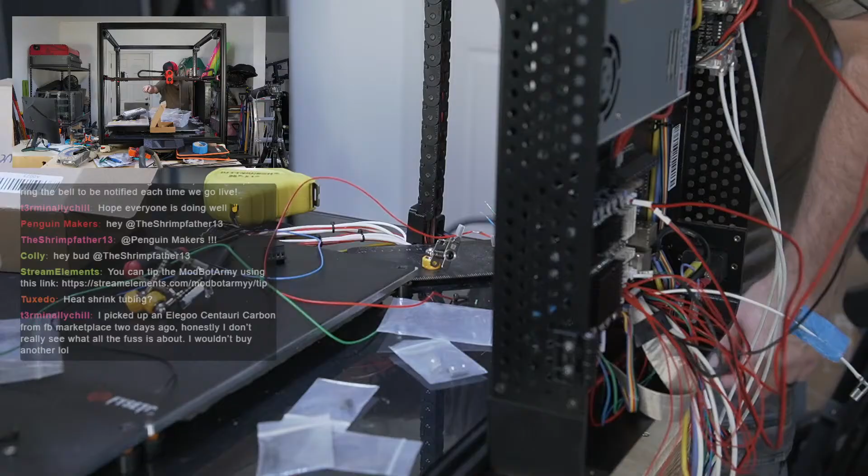Yeah, I got heat shrink. I would have pre-installed it, but because the wires are individual strand, I thought ahead and have a box of it right here. So the next thing I need to do is figure out what I can plug this power cable into to power the soldering iron. I'll probably have to unplug the fan, which is fine.

Okay. Yeah, there's the fan plug. No more fan for me. Okay, sweet, we got plenty of length. We've got our little tip cleaner right here, a little bit of solder right here, and we need our soldering iron. Where's the tip for this? There it is. Okay, we're ready to rock and roll.

No, there have been times, plenty of times, but I'm sure it's happened to you too, Tuxedo. And if it hasn't, just lie to me because it'll make me feel better about myself. Like soldering wires together in a situation where you need to preload the heat shrink because you don't have an end you can get it over, whether there's a connector or whatever. And I've forgotten more times than I'm proud to admit. So I will always take a reminder, grab the heat shrink.

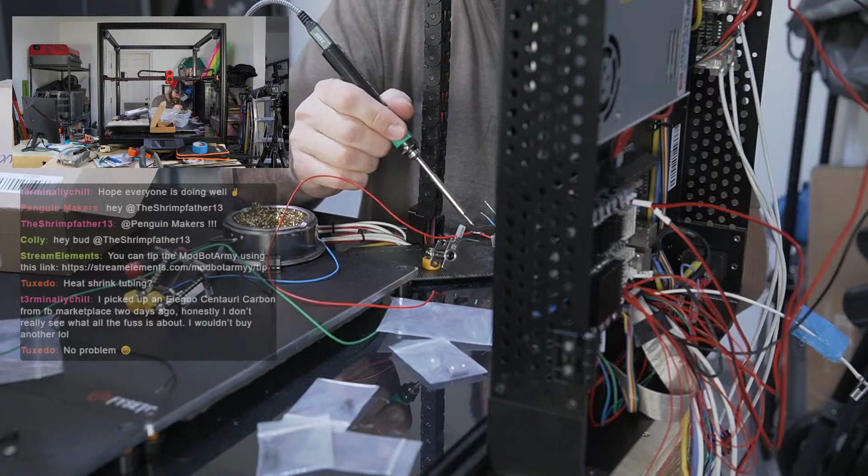I picked up a Centauri Carbon from Facebook Marketplace two days ago. Honestly, I don't really see what all the fuss is about. I wouldn't buy another. Oh, interesting. I mean, it's not a bad printer for the price, I think that's the big thing. Like, for what is the retail on it? It's like $300 or something like that. I think that's the biggest thing. Like, it's not like, oh wow, the Centauri Carbon is this groundbreaking printer, because it's not. But for the price, it's hard to compete with that at $300. I think that's really what its novelty is, its price, more than anything else.

We'll do the heat shrink all after. Okay, red wire's done. Blue wire.

All right, that makes me feel a little better. I'm like, if you tell me you've never forgotten, I'm like, dude, there's no way. Sometimes it's not that big of a deal when you forget, it's just kind of like a no. But there's certain situations I've been in where forgetting really sucks because you just don't have a lot of extra wire to play around with, and having to remove it can be quite difficult, in my opinion, to remove the solder from wires you've just put together. So sometimes I'll just cut and start over, but I've been in situations where it's not super feasible to do that. So okay, I've forgotten the heat shrink tubing.

Yeah, I've got a CC running next to me right now. I need some tuning. Centauri Carbon, but it has been fine. Yeah, I know quite a few people — that's maybe an overstatement. I know a handful of people that do a lot of really large printing for things like props, and they seem to be quite happy with it. It seems fairly reliable.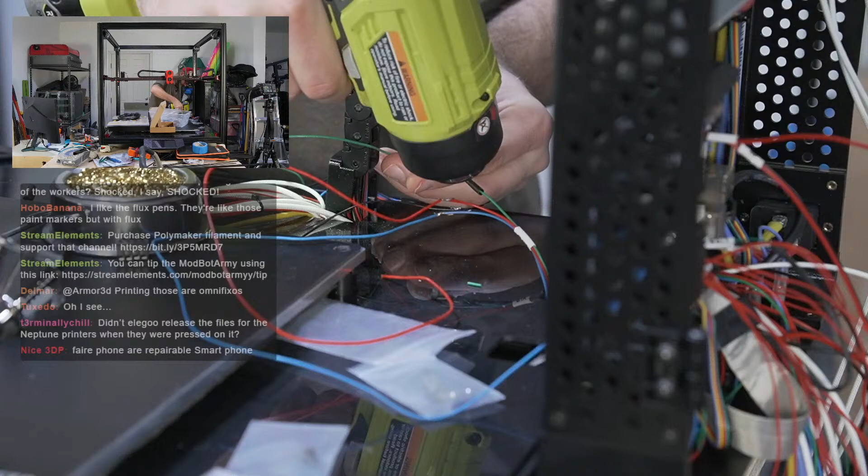Oh no, I smell burned hair. It must be my knuckles. It's not that hot, but I guess my hair thought it was.

Yeah, it must have been my knuckles.

Fairphone, or repairable. Interesting, I haven't heard about that. I feel like I used to scorch my hair all the time when I was doing a lot more, like back when I was doing some reflow stuff. It's a smell you never forget.

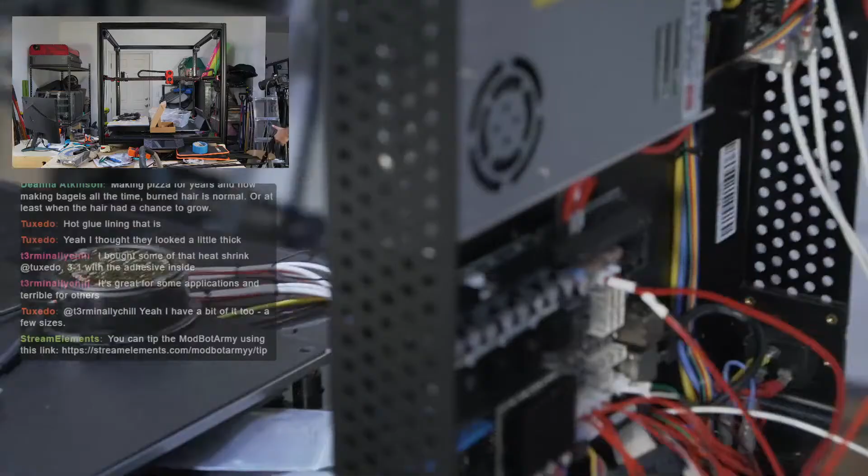Okay, calling that good enough. I bought some of that heat shrink, 3:1 with the adhesive inside. It's great for some applications, I'm sure it has its place, but for the stuff I've been doing it's just a pain because my goal is almost always to keep things thin. So pretty much any situation where the thickness of your overall wire bundle isn't a concern, it's probably fine. But with 3D printing, I'm typically always trying to keep things as thin as possible, so for that it's just been a kind of a pain in the butt.

Okay, so let's feed these wires through.

Man, this music is way too chill.

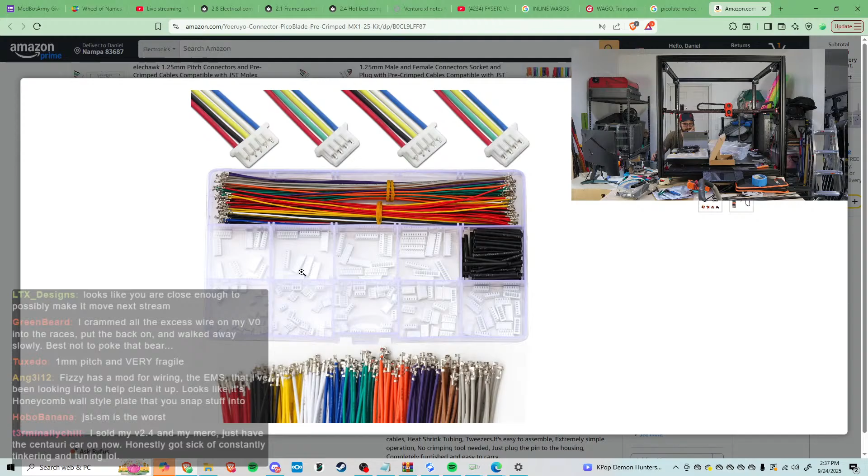Looks like you're close enough to possibly make it move next stream. Yeah, I was hoping we were going to get it to move this stream until I ran into the electrical issues, or found out there were issues with me being able to plug this thing in. But I feel confident next stream we will power it on and make it move.

It probably won't be next Wednesday though. We'll see when it might be. Next Tuesday is my birthday, and I was thinking about Wednesday just doing a chill hangout and print stream. But we'll see. If I get the receptacle in, if it all ends up working out, I might just want to get this thing moving because the suspense is killing me.